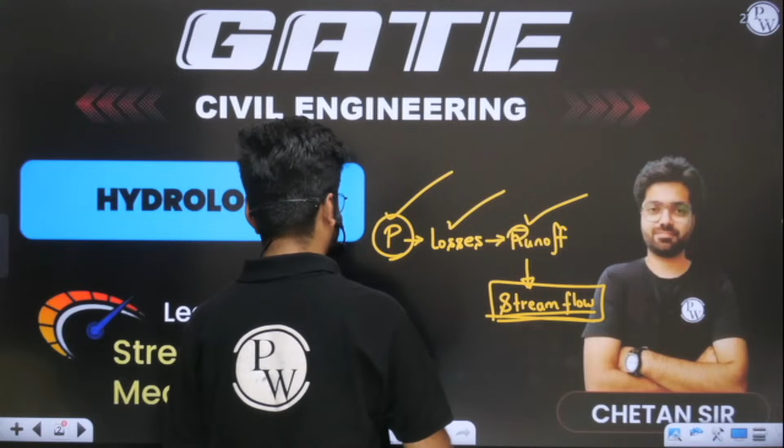So till now we have covered precipitation. After precipitation, losses take place. After losses, whatever water is left off becomes runoff. That water runs off over the land, subsurface flow, and groundwater base flow. After runoff, all the water through network of streams will join your stream, and hence it will become part of stream flow. So whatever water is left after the rainfall and after abstraction will ultimately become part of stream flow. Now in this chapter, we are going to measure stream flow. We have covered this in the last class, and today we are going to discuss this. I hope this is very clear now.

In runoff, yesterday we discussed what runoff is, what is direct runoff, what is base flow, what is delayed flow. We discussed types of streams: perennial, intermittent, ephemeral, and flow duration curve. Now today we are going to discuss stream flow. One small topic was left, flow mass curve, which we'll discuss along with the remaining things.

So in today's class we are going to discuss flow mass curve, measurement of stage, and measurement of velocity.

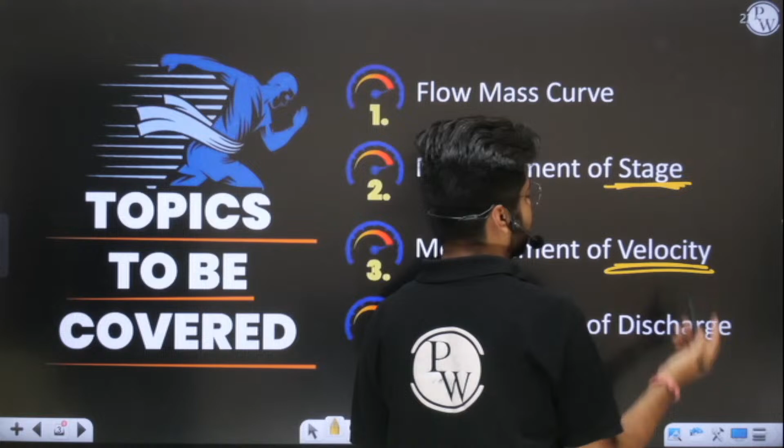Let us say we have a flowing water stream. What things can you measure, sir? Obviously I will measure the depth, I will measure the velocity of water, and I will measure the discharge. I will also explain why we measure it.

See, we have different kinds of streams: some are turbulent, some are sluggish, some are very fast moving. Based on that, we have different methods of discharge measurement. We'll discuss the conditions also, like which method is used when. So we'll start the lecture today. I hope everything is very clear to you.

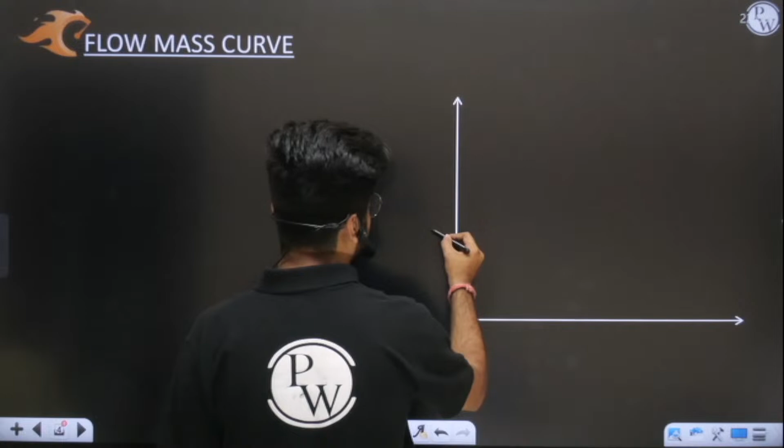So this is your discharge versus time graph of any stream. Now see, in this graph the discharge will vary. Obviously the river or any stream will not have a certain fixed quantity of water, it will move up and come down. So we have variations in this. If I plot the hydrograph or discharge versus time graph, I will observe that this graph will go up, sometimes come down, sometimes go up again, like this you will have certain variations. So the discharge versus time graph will vary, discharge will never be fixed, sometimes more, sometimes less. So this is your hydrograph.

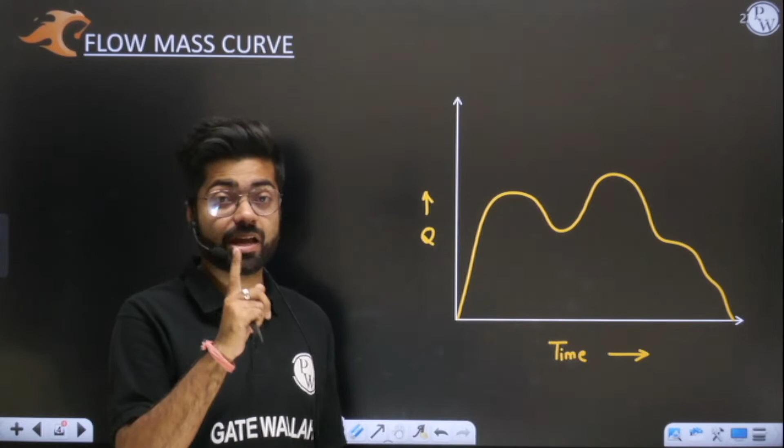Now what is the meaning of flow mass curve? Let me tell you, but before that let me ask you one question: tell me what is the meaning of mass curve. I have told you this thing before, so it's required that you all answer me what mass curve is. Everyone kindly tell me what mass curve is.

I have already told you what mass curve is. See, mass curve was - tell me, what was mass curve? Mass curve is none other than cumulative precipitation versus time.

So here we will also do cumulative value. See what you have to understand here - it is a plot of cumulative value.

Mass curve - you need to understand, this is the area. Let us divide it into certain parts. Let us say area 1 has area 1, the second area has area 3, the third area has area 6, and the fourth area has area 8. Now what I will do is the cumulative sum.

So cumulative sum will be 1, then 1 and 3 makes 4. Up to this point, what will the total area be? 1, 3, 6, this will be 10. Then when you sum it up, you will get 18. So this is cumulative value - this is mass curve, and this is the normal value. Yes, cumulative involves time. This is perfect.

Now if I will plot these cumulative values, you will see - wait, 1, 4, I have to remove this. Yes, so 1, 3, 6, 8 was there, and here 1, 4, 10, 18 was there.

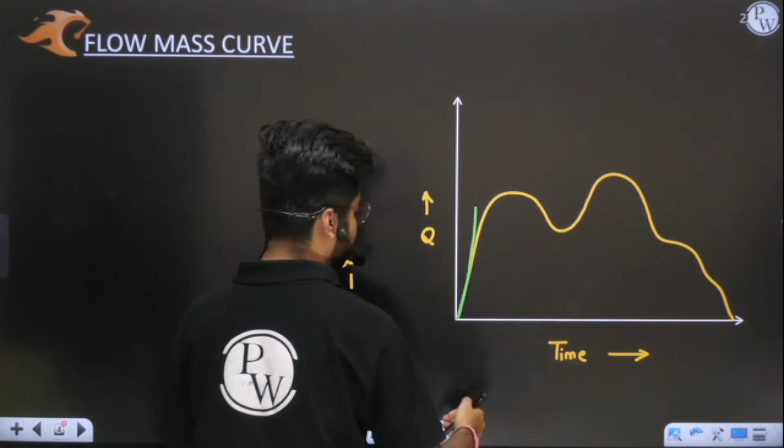Initially the graph will be same up to 1, but when you reach here, area is 3, but now this graph has to go up. It will go even higher, it will go up to 10. See, it is 6 here, but it is 10 there.

At 8 it is 18. So you will see that this will go up as you progress, as you move ahead in time. Areas will keep on adding, more area will keep on adding, and this value will go on increasing up to here.

So this graph will go up like this till this point. This is your flow mass curve. So what is this point representing?

If I want to understand what this point exactly is, I will say - this point will indicate the area up to this point. Let me shade it. So this is indicating area up to that point.

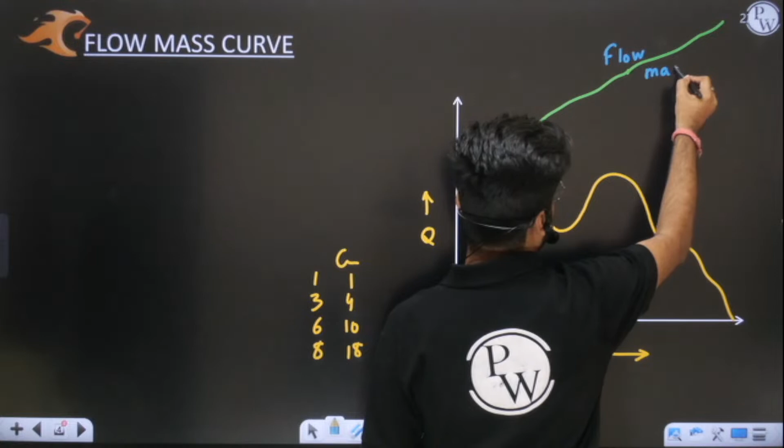This graph is known as flow mass curve, and it is indicating area up to that point T. So this is your flow mass curve. Understood, sir? Beautifully, I have understood.

So I will write the definition here. What is this? Flow mass curve is a plot of - listen very carefully - cumulative volume. If you will find area up to this point, you need to understand one thing.

In this hydrograph, if you will integrate from 0 to t, obviously you will get the volume, the total volume which has been passed through a section up to this time t.

Yes or no? Let us take an example to understand this clearly. Let us say we have a river, and this is your section. We are standing here observing, and obviously this section will give you certain discharge, because this is your river flow, or let us say a smallest kind of stream. So some discharge will be passing from here every now and then.

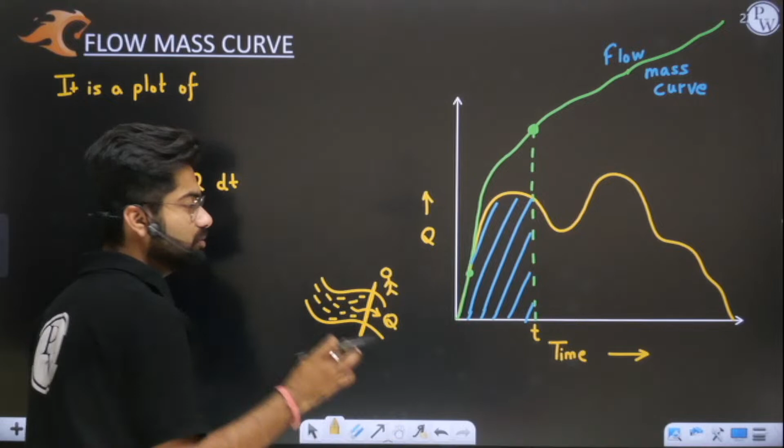This discharge is fluctuating also. Sir, tell me, what volume of water will pass through this section in 1 hour? What volume of water will pass through the section in 2 hours? So if I want to evaluate that, I have to integrate this hydrograph from 0 to 1 hour, 0 to 2 hours, like that. I have to integrate it.

I have to integrate my hydrograph from point 1 to point 2 in order to get the total volume of water which will be passing through this section. Yes or no? Tell me. So this point is indicating the amount of volume which has passed through this section up to time t.

If you want to find the amount of volume which has passed till here, obviously more area will be added. When more area is added, you will get a higher volume. So this is the logic behind this. We have understood very clearly that it is a plot of cumulative volume. You can also call this cumulative discharge from the start.

From the start is important because we will always integrate from the start, from 0. From 0 to this time, plot the value. Take different points, integrate, find the area and plot this area here. This area will give you the actual volume. So it is a plot of cumulative volume from the start against time. This is the definition of flow mass curve.

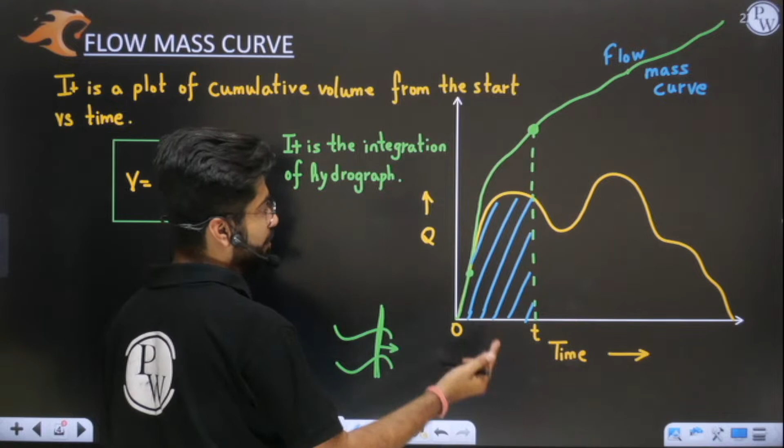So this green line is indicating volume up to time t that has crossed that section. How much water has crossed this cross section up to time t? This is answering that. This green curve is indicating volume up to time t. I hope this is clear. Yes or no? Tell me. So this is your hydrograph.

So this V is what, sir? This V is the volume, or you can say ordinate. Ordinate means the thing which is written on the y-axis. So this green curve is your flow mass curve, and this V will give you the volume up to time t. Simply integrate up to 1 hour, 2 hours, 3 hours, 4 hours, and so on, and get the volume up to different times.

So this is your ordinate of flow mass curve. Simply change the time, keep different values of time and get the value of ordinate which you have to plot here. Ordinate means the value which we plot on the y-axis. So if you want to draw the flow mass curve, simply put different values of t here and get different V. This gives you the V versus t graph, shown with the green line.

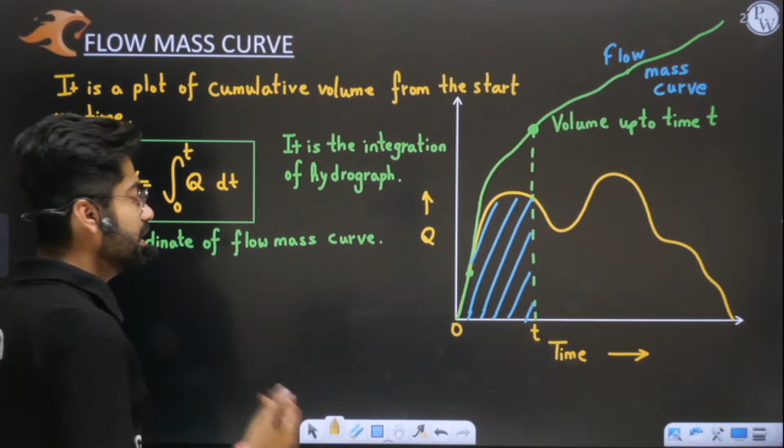Now the question arises, sir, why are we finding this? This point is important because it has been asked in your engineering services preliminary examination. Listen very carefully. This flow mass curve helps in determination of what? Determination of reservoir capacity. So this is the thing.

How come, sir? Listen very carefully. Let us say we have a river valley and on that river flow was there. Now imagine we have constructed a reservoir or a dam there. Try to understand. Let us say we have constructed a huge dam here.

Okay, let us say we have constructed a huge dam here. Then what will happen? You need to understand that in a certain amount of time, this water will slowly and steadily build up here. We have to collect water here, so obviously we have blocked it, so this water will start building up here. So how much water will be accumulated behind the reservoir in time t? That we can easily evaluate from this equation. Yes or no? This I can easily evaluate, and based on that I can build my dam also.

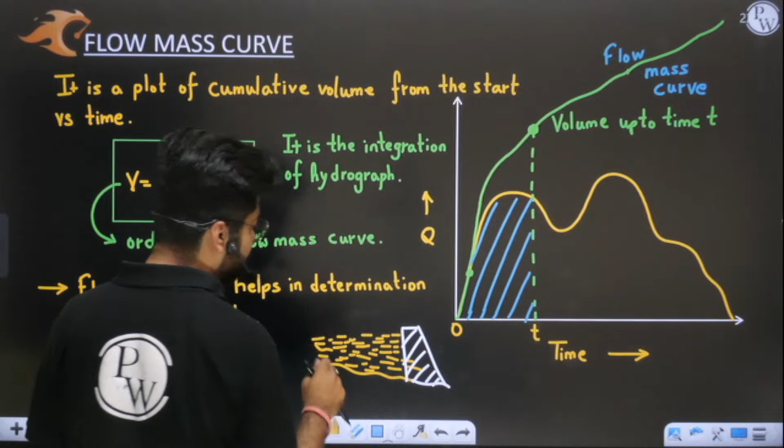Based on that I can have my reservoir capacity. So the capacity can be determined with the help of this integration, with the help of your flow mass curve. This flow mass curve will tell you how big my reservoir should be. The more water we want to store, obviously we will take a higher value of T so that more volume accumulates, and obviously the cost for the construction of such a dam will be more. So I hope this thing is clear.

So this is your flow mass curve. Yes or no? Yes, perfect. I hope the flow mass curve thing is very, very clear to you. Now we'll move ahead and discuss what stream flow is. So this was your flow mass curve. Now we'll discuss the very important topic which you have to start today, stream flow.

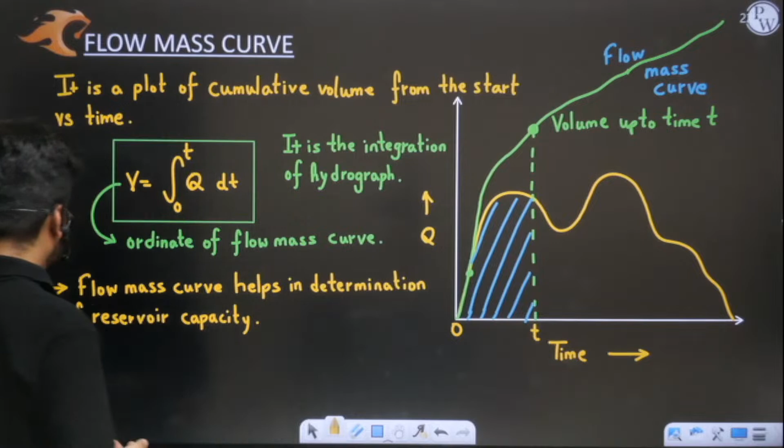Listen very carefully. Sir, you told me that precipitation is there. After precipitation, losses are there. After losses, all the infiltration, evapotranspiration, interception, depression storage, all these things are done. Then runoff will be there. After runoff, stream flow will be there. Okay. Now guess. I am just asking you a simple question.

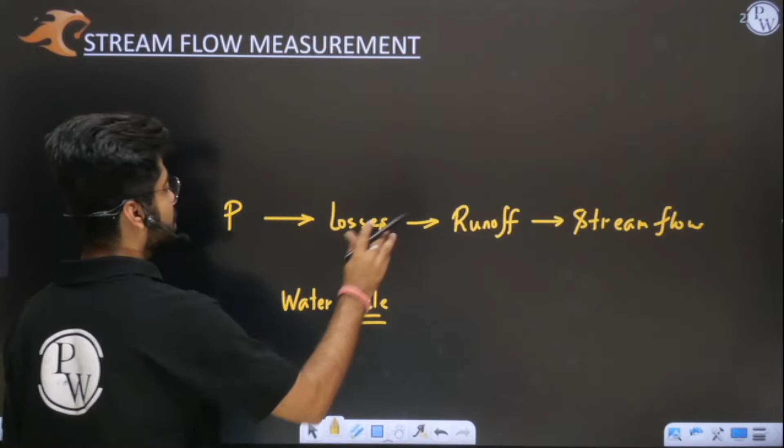This is a phase of the water cycle. You all should understand this is a part of the water cycle. In the water cycle, sometimes precipitation will be there, sometimes losses, sometimes runoff, sometimes stream flow. So these are all different phases of your water cycle. I have a simple question. Out of all the phases of the water cycle, tell me which phase you are going to measure accurately.

Obviously we have tried to measure precipitation, losses, and runoff also. I told you around 6 methods for determination of runoff yesterday, and in this chapter we'll discuss measurement of stream flow. So can you guess which phase we are going to measure most accurately out of all these four?

Yes, stream flow is the one. Absolutely correct. Because a stream has a well-defined geometry, and the discharge, flow, velocity, or depth will be easily measurable as compared to your precipitation, which is a very variable quantity. Losses are also very variable. Runoff is also variable. Runoff happens on land.

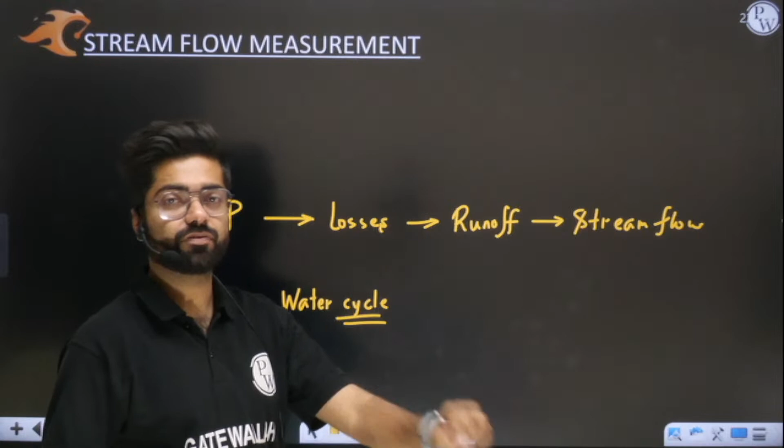You need to understand how you can measure runoff. It depends purely on land use pattern. Somewhere forest will be there, somewhere barren land, somewhere fallow lands. So in different cases you will find huge difficulty in measuring the runoff. All these are difficult to measure and will not give you accurate results, but if you measure the discharge, velocity, or depth of stream flow, you will get it most accurately.

So I will write here the very first important point: stream flow is that phase of the water cycle which can be measured most accurately. Now, what things are we going to measure? In this chapter we are going to do measurement of what?

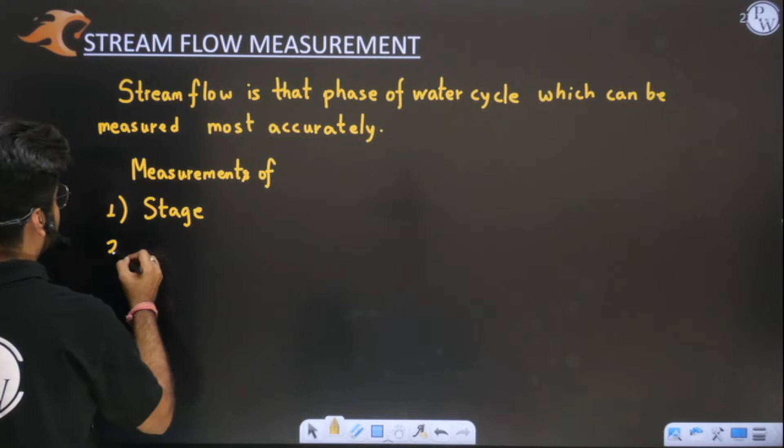Measurements: first we'll measure stage, secondly we'll measure velocity. This velocity thing is important because a velocity question has been there once in your GATE examination, and discharge is also a little important. A question from measurement of discharge was there in your GATE examination in 2023, in set 2. Obviously this Streamflow chapter is not so important, but we'll discuss it.

So first we are going to measure stage. How do we measure stage? What is the meaning of stage? Stage means the depth. The depth of water changes. You should appreciate the fact that with passage of time, the depth of water changes. Yes or no? Yes.

Yes, we can easily calculate dimensions of a river, perfect. These are practical because the things we have to measure are limited to a very small space. But rainfall happens in a very big area, and runoff takes place in a huge area, so those are very difficult or cumbersome to evaluate. Stream flow takes place in a confined, limited area. That's why the measurement is accurate.

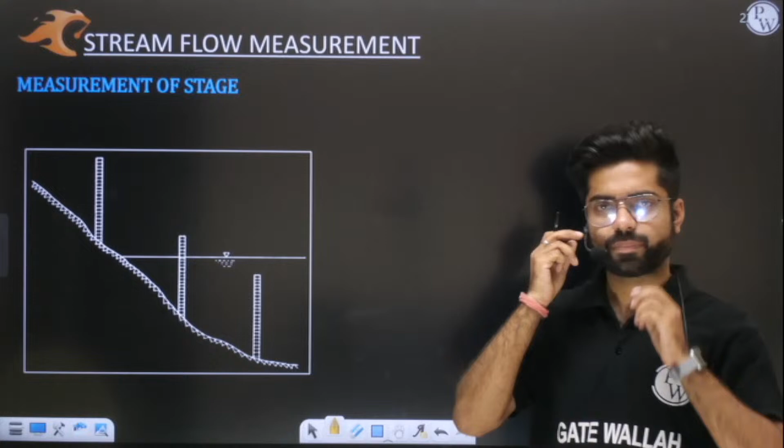Now the first thing we are going to measure is stage. For measurement of stage we have some manual methods and some automatic methods. I will tell both to you all. The very first one is manual methods. In manual methods we have two methods. We have staff. See, these are your staffs.

Let me write the two types of methods for measurement of stage. This is simple. The first one is manual methods. In manual methods, again two methods are there. The first method is the staff gauge. We will manually put the staff at different levels of your river. Different staffs are required when your river is deep; with moderately deep rivers you put different staffs and take differential readings.

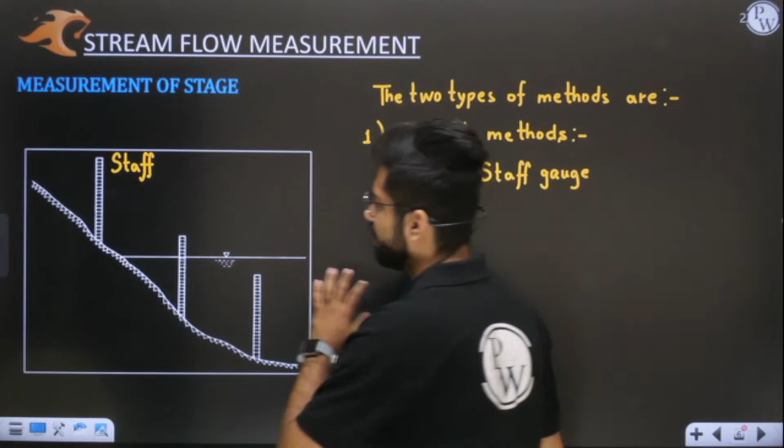But if we have shallow streams or shallow rivers, then we'll take only one staff, and the level of water will give you the mark up to which the depth of water has been. This staff is completely submerged, that's why we require more staffs. When the level of water increases, this one will also get submerged, then this staff will work. So we have differential staffs placed so that the level of water is measured correctly. So this is a staff gauge.

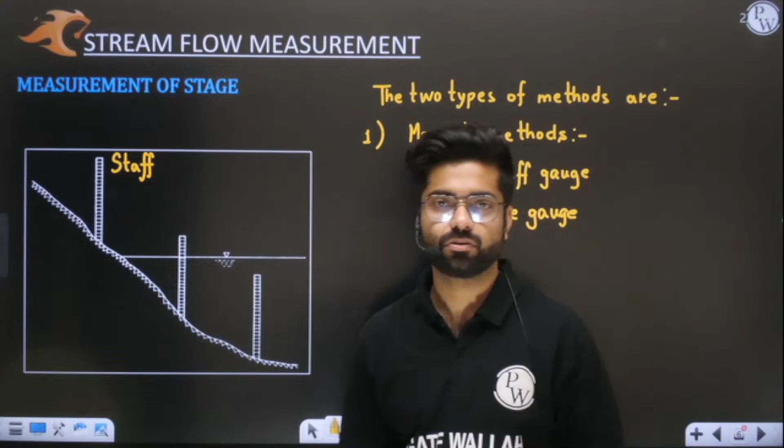The second one is your wire gauge. In wire gauge we have a wire which is lowered into the stream to measure depth. Imagine you are standing above some bridge and lowering a wire into the river. At the bottom you put some heavy weight such as a stone or some metal, so that the wire goes straight into the river or stream. Let us say we lower a wire here and it has touched the bottom.

After that we'll take out the wire and see up to which mark it has wet the wire, and up to there I will measure the distance or depth. So this is your wire gauge method. In this method, a wire is lowered into the stream to measure depth. Yes or no?

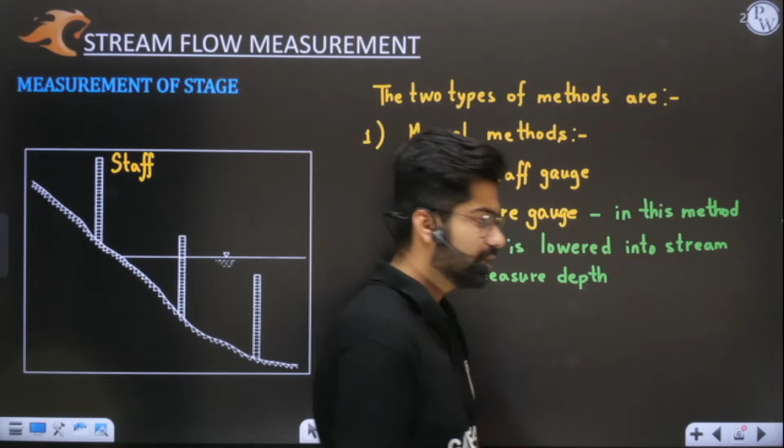Generally the length of wire you take is not more than 25 meters. So I will write here: this method is suitable up to a depth of 25 meters, not more than that.

Okay, 25 meters is, you can say, sufficient height. So wire gauge is basically for this one only. Okay, now this is the first method. So this first one is your manual methods. I hope manual methods are very clear to you. In this we have discussed staff gauge and wire gauge.

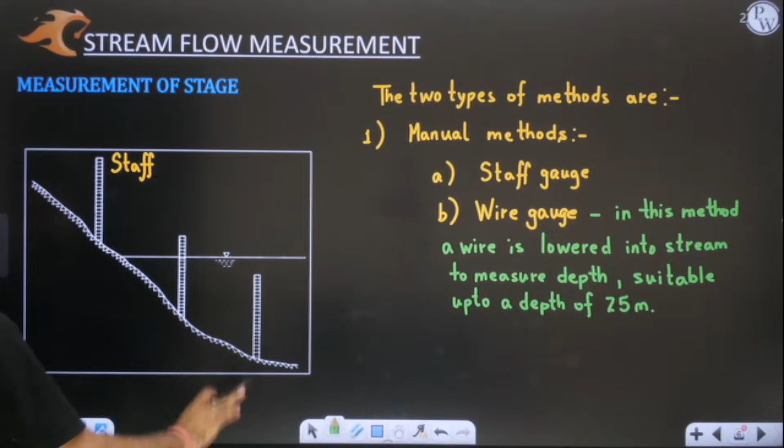Okay, here you can see your vertical staff kept here. So these are your staffs, these are your vertical staffs. You must have seen these vertical staffs in survey also. Okay, now we'll move on to the second method, which is your automatic method.

See, in these manual methods, obviously you need to understand manpower is required, human resource is required. Some skilled man will be required here in order to install the staff, and a man should be required to lower the wire into the river or stream. So for manual methods we require labor. Now the second one is automatic methods.

Okay, the second one here is automatic methods. In automatic methods there is no requirement of labor. Okay, there is no requirement of human resource, there is no requirement of a person. Okay.

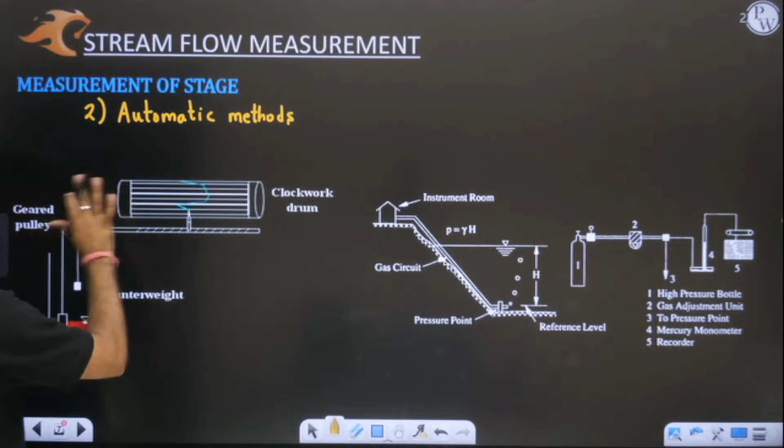Okay, now we'll discuss automatic methods. See, in automatic methods we have two methods. See, this one is your float gauge recorder, and that one is your bubble gauge recorder.

Okay, sir, how do they measure? Sir, kindly tell me how they measure the depth of water. So tell me how the bubble gauge and the float gauge measure stage. Okay, so you need to understand this thing. This is important. Listen very carefully. See, you can see this diagram here.

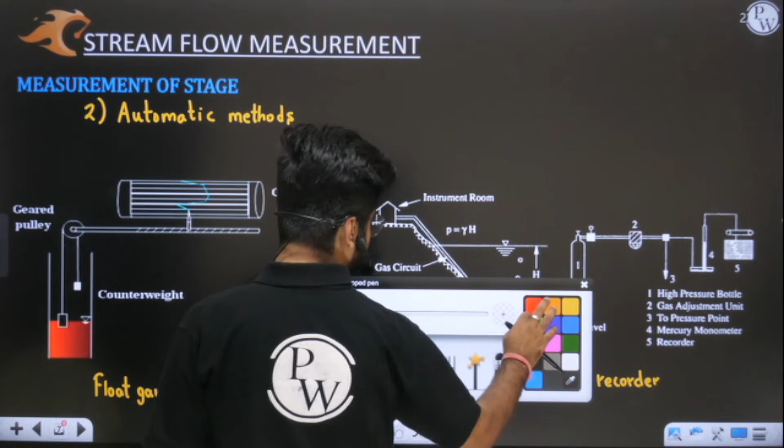In this diagram you have to understand we have a float. Okay, I hope you can see this float. Let me color this with some different ink so that it is more clear. I will color it with white only. Okay, yes. So this is your float, a plastic float obviously. See, this float seeks the level of water every time. Understood, sir? So this float will seek the level of water every time.

Okay, now see this entire assembly. See, we have a pulley. From this pulley we have lowered a float, and in order to keep this wire completely tight we have added a counterweight. So this is your counterweight. See, what is the function of the counterweight here? So that the float remains stable. Otherwise what will happen? This float will move here and there.

Okay, then second thing, we have closed this entire assembly into a stilling well. We have a closed chamber. In this we have installed this assembly. Okay, sir, why? Sir, tell me why you have taken a stilling well here. Because you need to understand, this is your stilling well. In your streams or rivers fishes may be there. Wave action is also there.

So because of some action of fishes, insects or birds maybe, or let us say waves, because of all these rough actions this system can become unstable. Okay, this wire can get cut if fishes are there. Or this system will ultimately become unstable if you keep it open. So that's why I am putting this entire arrangement in a stilling well.

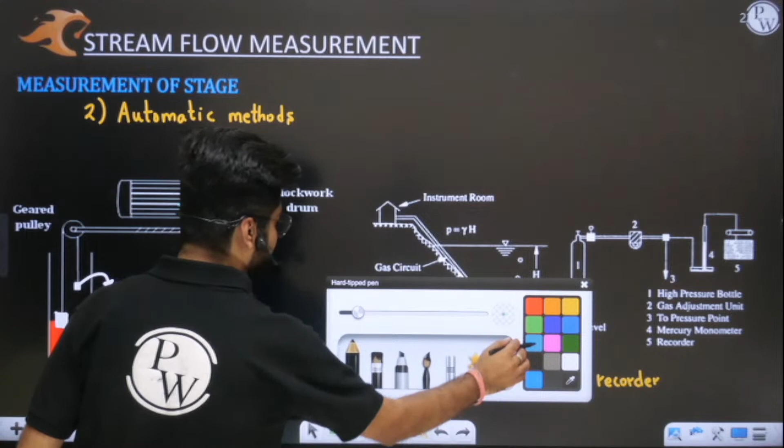Now you need to understand that this cylinder will have the level of water equal to that of the outside water, the level of the stream. Okay, now imagine water will go up, and water can go down also. See, you need to understand this float is constantly at the surface. Now when water goes up, this float will also go up, and this counterweight will go down.

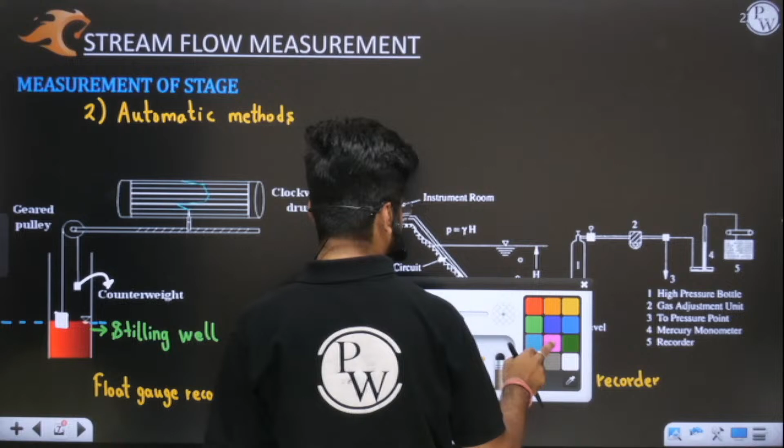And when this float will go up, you need to understand, from this pulley a pen is attached. When this pulley will roll, this pen will start moving. When this water will go down, float will also go down, and the pen will start moving in this direction. Okay, this is rolling. This is your clockwork mechanism.

This we have already discussed in your natural siphon part, natural siphon weighing bucket, where we have discussed recording rain gauges. So now when the float is going down, when water level in the stream is going down, this pen will start moving in this direction. When this float will start moving up, this graph will go in this direction. Like this you will have a graph which will give you continuous variation of the depth of a stream versus time. Yes or no?

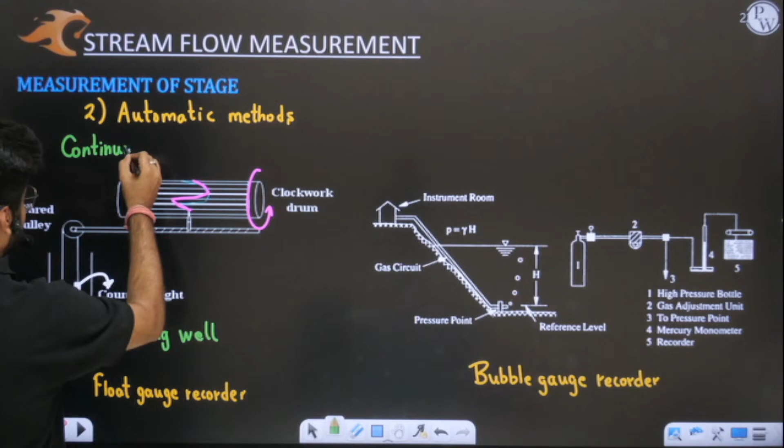Sir, this float gauge recorder will give me continuous variation of depth, continuous variation of stage, means depth of water versus time. From this chart I can read at what time the level of water was what. So this we can read out from this graph. Understood? Now the second method.

Great. Yes, you all are talking about consistency and inconsistency in the chat box. Obviously no one can beat consistency. Consistency is the ultimate key.

So what I was saying is, now the second method is your bubble gauge recorder. What happens in a bubble gauge recorder? Let us assume this is your level of water. Now we have an instrument room here, a laboratory, just in the vicinity of your stream or river, whatever it is. Now what will happen?

We will lower down a pipe up to the bottom of your river or stream. Let us say this is your river bed, and up to this point we lower a pipe. Now with the help of some pump or motor, I will insert pressure, and through this pipe I will pressurize air bubbles to come out from here. These air bubbles will come out and will rise to the surface.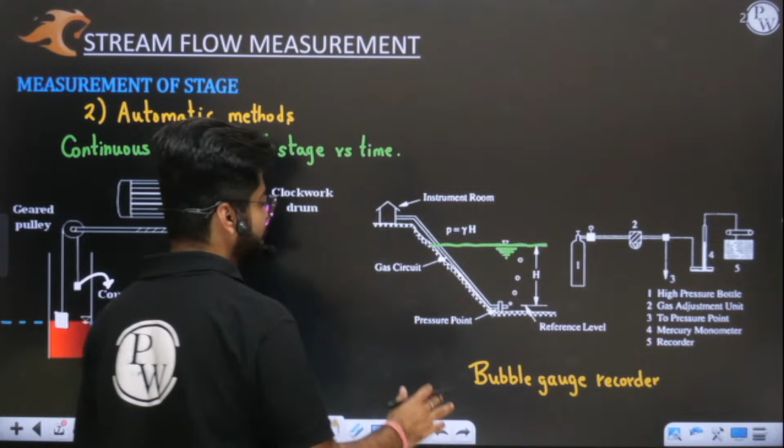Now tell me, how much pressure will be required for this air to come out? I hope you all know the pressure at depth h in your fluid. You must have read that pressure at depth h in any liquid medium is rho gh. So now the pressure can be calculated, because the pressure which is required to squeeze this air out at the bottom will be equal to this pressure only.

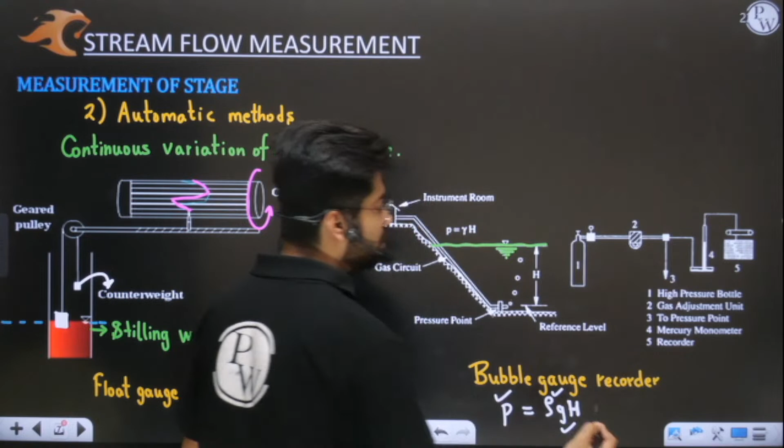This pressure will be read here in the manometer, in the instrument room. Rho we all know is 1000 kg per meter cube, g is 10 meter per second square approximately. So from this formula we will find the value of h. So bubble gauge will require some pressure in order to ooze out air bubbles, and that pressure we will put in this equation to find h. Is this thing clear? So with the help of this pressure I will find the height.

So these are your automatic methods. We have discussed measurement of stage: staff gauge, wire gauge, and automatic methods, in which we discussed float gauge and bubble gauge recorder. Now we'll move ahead and discuss measurement of velocity, another important concept.

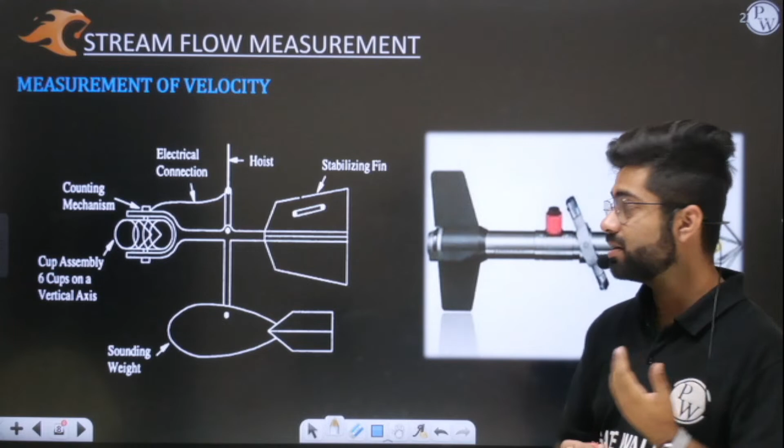We have current meter, which is one of the important topics of hydrology. Current meter is also known as price meter. You can see this is a current meter. We have two kinds of current meter basically: a vertical current meter and a horizontal current meter.

Try to look at this assembly. Basically, we will discuss two types of current meters. Current meter is used for measurement of velocity. Current meter is also known as price meter.

Current meter is also known as price meter, which is used to measure velocity. Firstly, you need to understand these are of two types. The first one is a horizontal one.

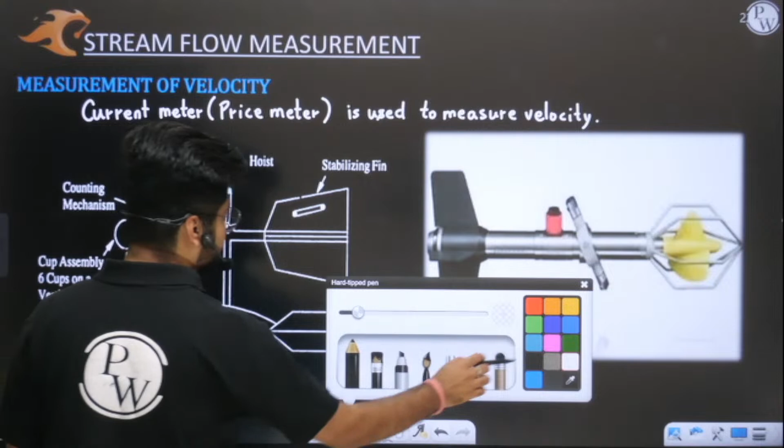In this horizontal setup, this is our vertical current meter. How is this vertical, and which is horizontal? This is your vertical price meter or vertical current meter, and this one is your horizontal current meter.

Understood? See, what is the principle or mechanism with which your current meter works? What I will do is submerge this assembly into the stream. This complete assembly will go down into the water.

After going down into the water, water will be continuously flowing. That flow of water will act on this axis, around which we have 6 cups on a vertical axis. This is the cup assembly. We have basically 6 cups here, and these cups will start revolving.

You must have seen at the top of some buildings some wind vanes. Those wind vanes rotate when there is optimum wind velocity. You will see that the wind vane rotates.

In a similar fashion, when this water starts flowing, these 6 cups which are placed here, this cup assembly, will start rotating. You should appreciate that the faster the velocity of the water, the more speedily these cups will rotate. The rotational speed, the number of revolutions per second, will be more if your water is faster.

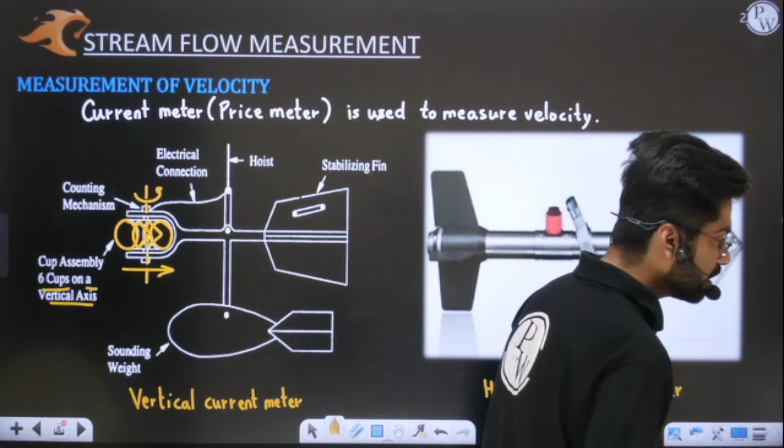So what this means is, in this we have a vertical axis around which this assembly is rotating. About this vertical axis, your cups are rotating due to the flowing water.

But in the horizontal current meter, you need to understand this meter has a blade. Can you see this blade? When this current meter moves across the river, let us say we have submerged this entire assembly into the water.

Now what will happen? Because of the flowing water, you will see that this fan, this blade, will start rotating about a horizontal axis.

This blade will rotate. The faster the rotation of this blade, that implies that the river water or stream water is even faster. The rotational speed of this blade, the rotational speed of the current meter, will indicate how fast the water in your river is.

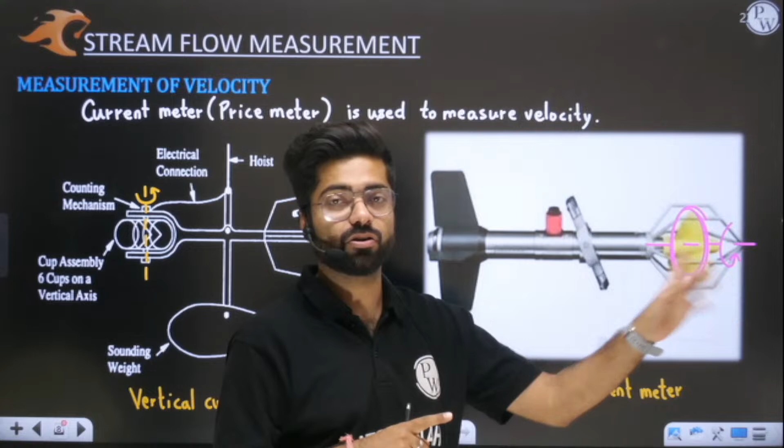So in this one, rotation is about the horizontal axis. This is your horizontal current meter, because the axis is horizontal. So we have basically two kinds of current meter.

But one thing is for sure, we need to understand that velocity is proportional to n, meaning the rotational speed of this assembly. Listen very carefully, we have to understand this.

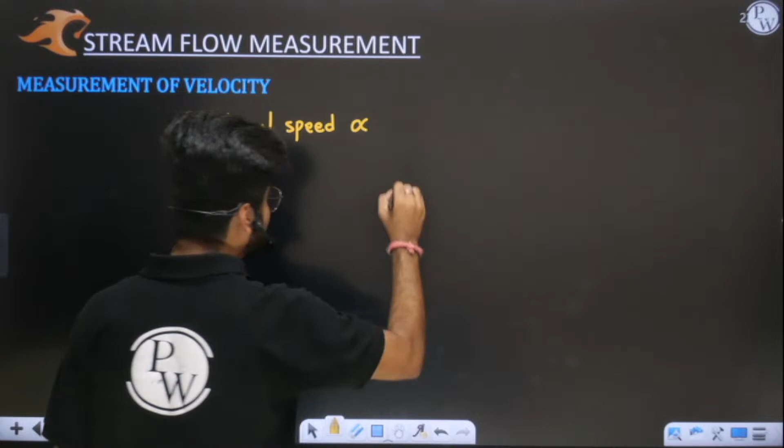Here, that rotational speed of current meter is proportional to the velocity of water. The faster moving water is, the more rotational speed of your current meter you will see.

So higher the stream velocity, higher will be the rotational speed of your current meter. This is an important phenomena you need to understand. I wrote it in reverse, but basically we should write stream velocity, or velocity of your river or stream, is proportional to rotational speed. So V is proportional to N.

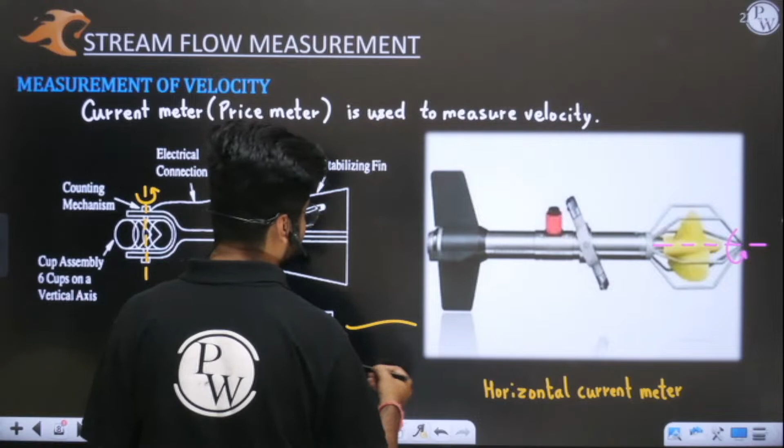I hope this is very clear to you. Now I will write the theory part. Current meter, as I've already told you, is used to measure velocity at any depth at any given section. Let us say this is your river flowing, you are here, and in this section you can go up to any depth and find the velocity with the help of this current meter.

Basically it is of two types. The first one is vertical axis current meter. The second one is horizontal axis current meter. So we have vertical one, we have horizontal one.

Now we have a sounding weight at the bottom. In this current meter we have certain attachments. Let us see here - this is your sounding weight. At the bottom you can see we have a weight here. Why is this weight here?

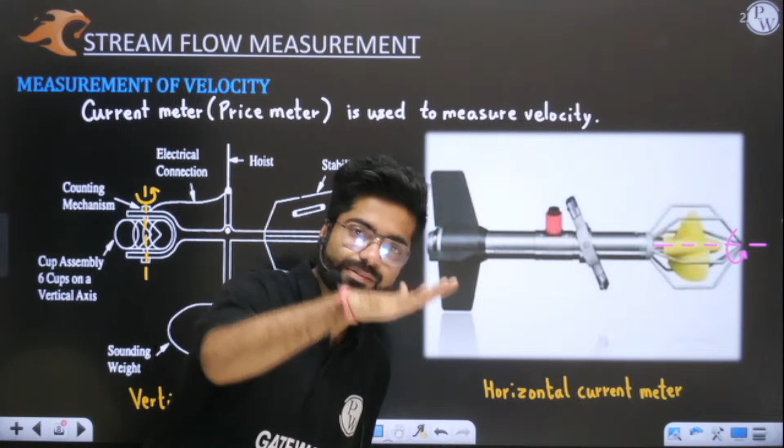You need to understand, when you will lower the current meter into the river, this sounding weight will stabilize the current meter. If this weight was not there, this entire hoist will disbalance. Because of this weight, this vertical assembly will remain in a straight line and will be stable. We have a stabilizing fin also here, we have a sounding weight also here, so that this entire assembly remains stable and is not affected by shock waves or something.

So I will write what is sounding weight. Sounding weight basically stabilizes or balances the weight of current meter.

How much weight we should attach here, the formula for that is given by W equals 50 V average into D. W means sounding weight, and this weight will obviously be in newtons. V bar is average velocity of your stream. D is depth of water.

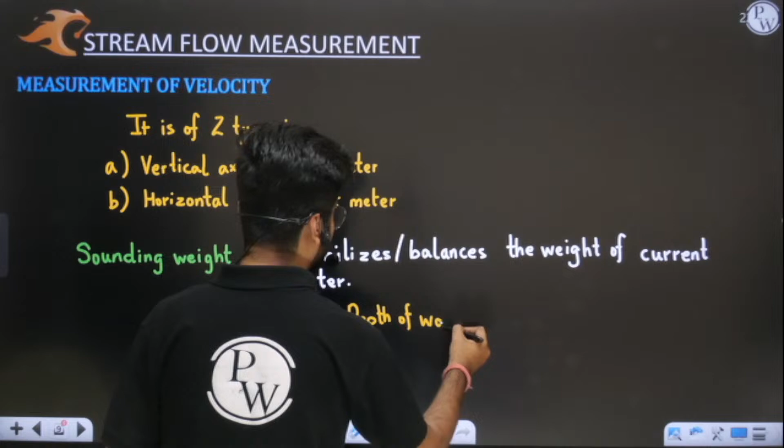So more the depth, more is the weight which you should attach, otherwise it will get unstable. More the depth, more the weight. This is a simple concept. I hope this sounding weight concept is clear to you.

Now, you have been told that stream velocity is proportional to rotational speed. This is for sure, this is simple. Now we have one formula - if we apply constants here, we get this final relationship: V equals AN plus B. This is the ultimate relationship which you have to remember. V is proportional to N, and when I add constants, we have two constants known as A and B.

Now how do I calculate this A and B? For calculation of A and B, I have to do calibration. The meaning of calibration is that I have to find these constants. Once I know these constants, I will put these values here and simply put the value of N in order to evaluate or compute the value of your stream flow velocity. Let us say you know the value of A and B.

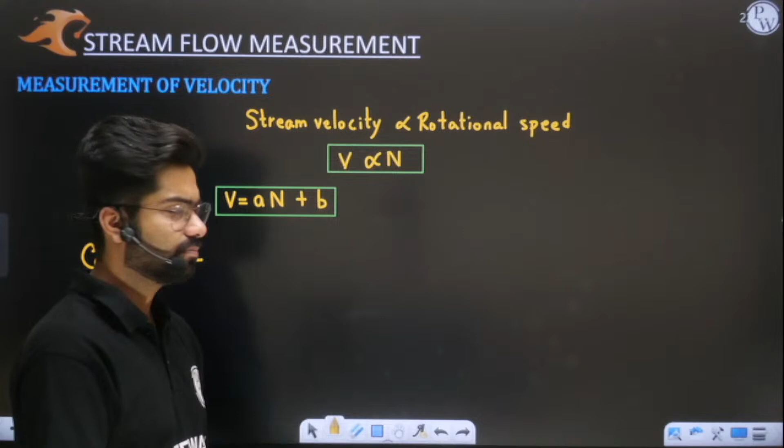Just suppose you know the value of A and B. Let us suppose that we know the value of A and B.

Hello, dear. Hello, dear. How are you?

So what I am saying is, let us suppose we know the value of A and B. Now I have lowered down the current meter into the stream. Let us say this is a stream, and we have lowered the entire assembly of the current meter into it, going 2 meters deep.

When we have gone 2 meters deep, the current meter has rotated 50 revolutions in 1 minute, that is, 60 seconds. So the value of n will be 50 rotations in every 60 seconds. This is the rotational speed n.

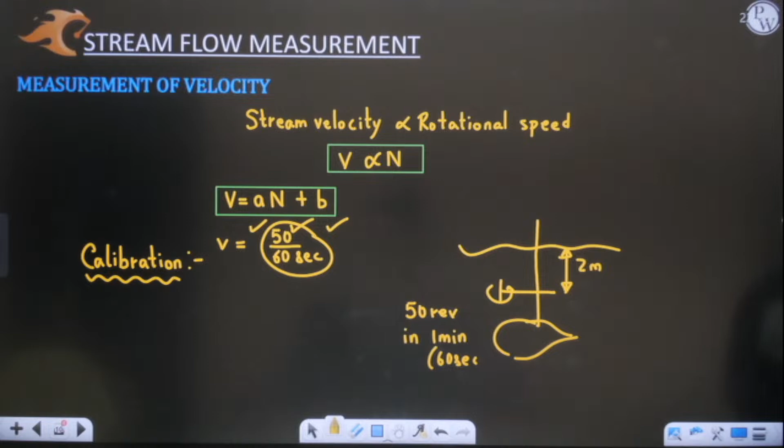When you put the value of n, since you already know A and B, simply by putting the value of n you will obtain the velocity of the stream. Yes or no? But first, you have to know the value of A and B.

This is important. So now, tell me how I will find the value of A and B. For finding the value of A and B, we have an instrument known as the towing tank.

Calibration means we have to find these constants A and B. We have to calibrate the current meter and find a relationship between V and N. This calibration is done with the help of a towing tank. What is the meaning of towing tank?

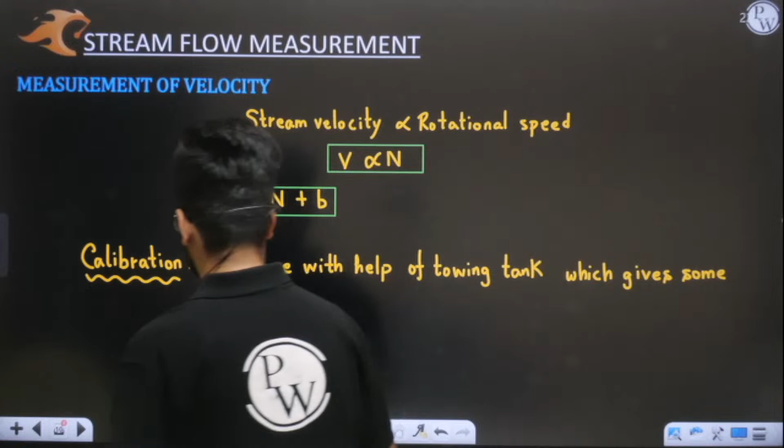I will explain, don't worry. With the help of the towing tank, which gives some values of n corresponding to V, which helps in finding constants A and B. How? Tell me.

A towing tank is an instrument with the help of which you can pull a current meter. Let us say this is your towing tank, and this water is permanently still. In this water we have no velocity; the water is not flowing. Let us say this is your towing tank.

Try to comment, everyone. Now with this towing tank, I have attached a current meter. When this towing tank moves, the current meter will be lowered into the water.

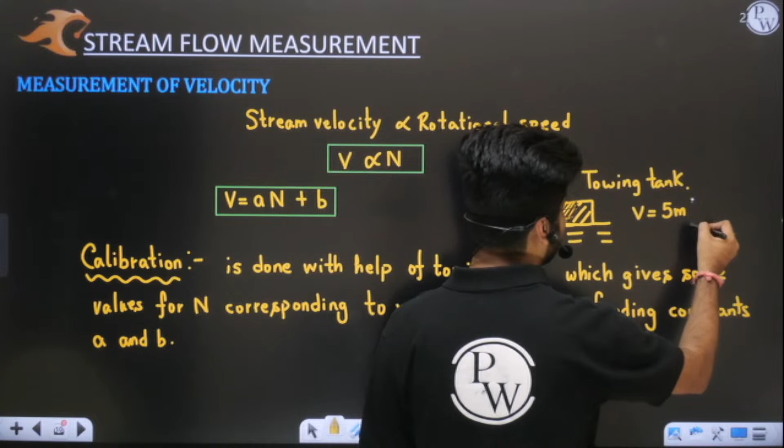Now let us say we have moved this towing tank. A towing tank is a kind of tractor thing, pulling the current meter. Let us say we have pulled this towing tank at a speed of 5 meters per second, and when we have pulled it at that speed, the number of rotations in the current meter is, let us say, 40 revolutions per minute.

In 1 minute, with the help of a stopwatch, I will count it, and then I will change the speed. Let us say I just double the speed. When the towing tank moves faster, the rotational speed or number of revolutions will increase. Let us say it has gone to 70, or let us say 90 per minute.

So when velocity is 5, n is 40. When velocity is 10, n is 90. You will use this equation, putting the value of v and n. Again you will put the value of v and n. You will get two equations. Solve them simultaneously and you will get the value of A and B.

Solve that equation simultaneously and you will get the value of a and b. Yes or no? Have you understood this thing?

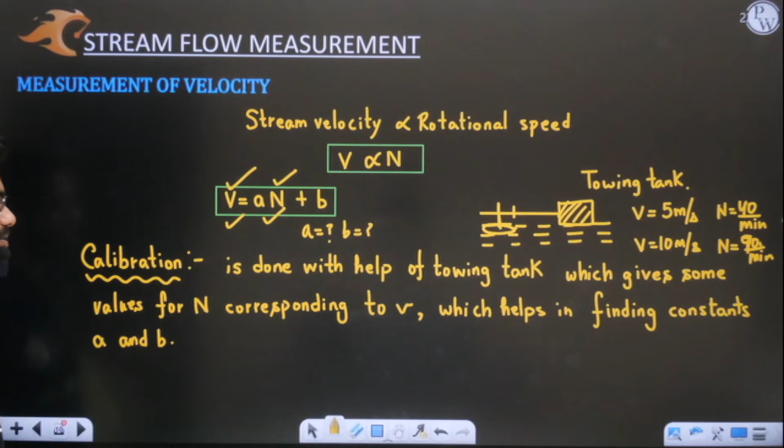So with the help of towing tank, you will drive that towing tank. You will obtain certain speeds, and corresponding to those speeds you will find the rotational speed. You will count the rotational speed, you will observe it. With this data, this towing tank will give you some values for n corresponding to different velocities, which will help me in finding constants a and b simply by using this equation. So I hope this thing is very clear to you.

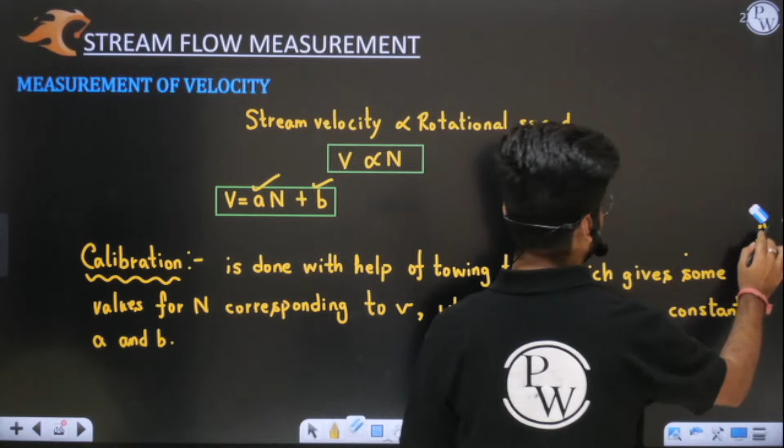So with the help of towing tank you will find. Let me give you some example with the help of which we'll understand how this towing tank thing works. And after we have found out the constants a and b, simply put the value of n and get velocity. Your current meter will give you rotational speed. Simply put that rotational speed and find the velocity. This is one of the best methods to find velocity at any depth, at any section. So is this thing clear?

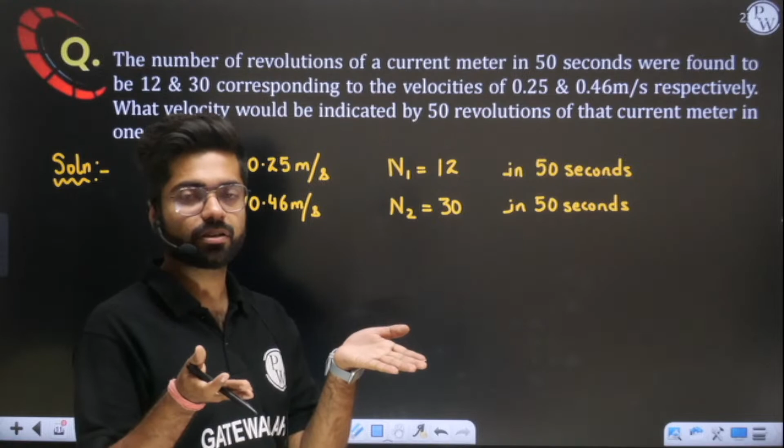Now the question is asking what velocity would be indicated by 50 revolutions of that current meter in 1 minute. So if I want to find the velocity, first I have to find the equation. Without finding A and B, how will I find velocity? First, I have to find A and B. Then I will put the value of n which they are giving, and obtain the velocity, because the question is asking you velocity.

But for that, we have to do calibration first. With the help of towing tank, I will find the constants A and B, and then I will move ahead and find my velocity. Tell me how I will do this. You all know the relationship is V equals A n plus B. Relationship is V equals A n plus B.

Now, if V equals A n plus B, then I will use these values. First equation: velocity is 0.25, A is A, and N is how much? 12 revolutions in 50 seconds. Rotational speed is what?

12 by 50. Okay. I will not write N here. This is 12 revolutions in 50 seconds. This is 30 revolutions in 50 seconds. So I will write the value of N is 12 rotations in every 50 seconds, number of rotations per second, plus B. So this is your first equation.

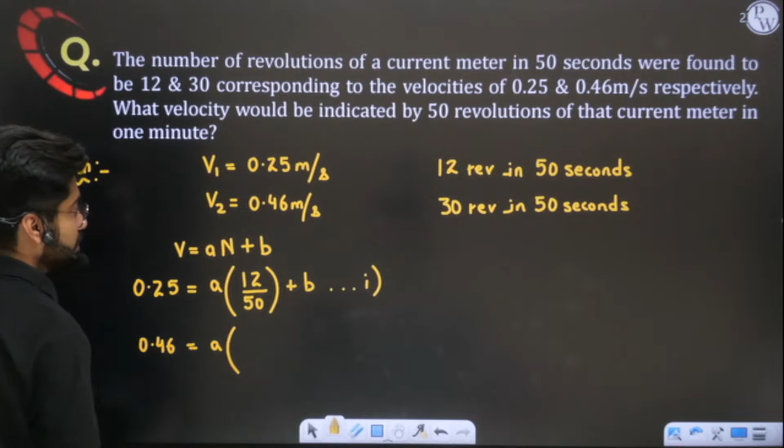Now the second equation will be velocity is 0.46. N value is 30 upon 50, plus B. This is the second equation. Now I have to simply solve them simultaneously.

See, subtract this. When you subtract 1 from 2, B and B will get cancelled. This will be 18 by 50 and this will be your 0.21. So 0.21 divided by 18 into 50, you will get the value of A. Okay. So this is simple. You can solve it. Let me solve it in calculators and see what we are getting here.

When you solve these two simultaneous equations, solve for A and B. So from this one, I will simply calculate the value of A. When you subtract, B and B will get cancelled. This will give you A as 0.5833. Okay, now A you have got.

Simply put this value of A in this equation and find the value of B. When you put A as 0.5833, multiplied by 12 by 50, subtract it from 0.25, you will get the value of B, which is coming out to be 0.11.

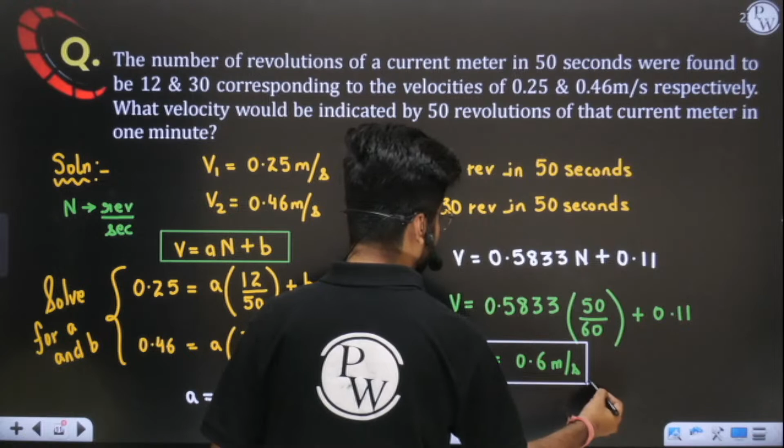Yes, so what we are getting here is 0.6 meter per second. When you solve, you will get it as 0.6 meter per second. Okay, so this is the solution to your GATE question. I hope it is very clear to you.

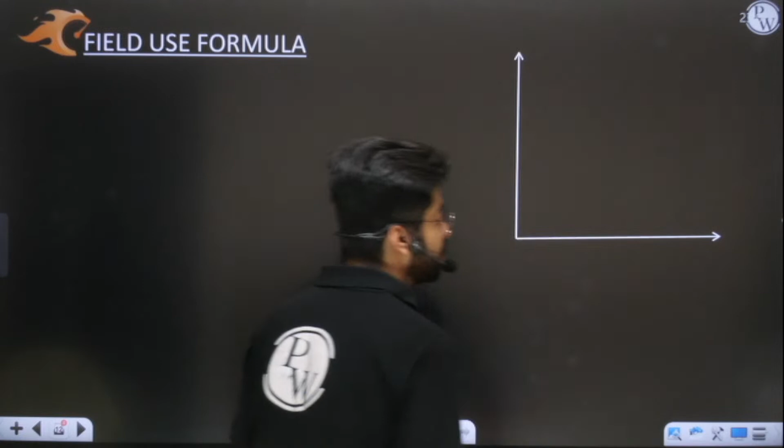Okay, so can you tell me the value of velocity, will it be same at every depth? The answer is no. The velocity will be different at different depths. Listen very carefully here. The velocity will be different at different depths.

So on this x-axis, I have written velocity, and on this y-axis, I have written depth. This is basically a logarithmic kind of curve. So velocity is less at the bottom. It will increase as your depth is increasing. See, this is your channel bed. As you go far away from bed to the surface, you will see that velocity is increasing.

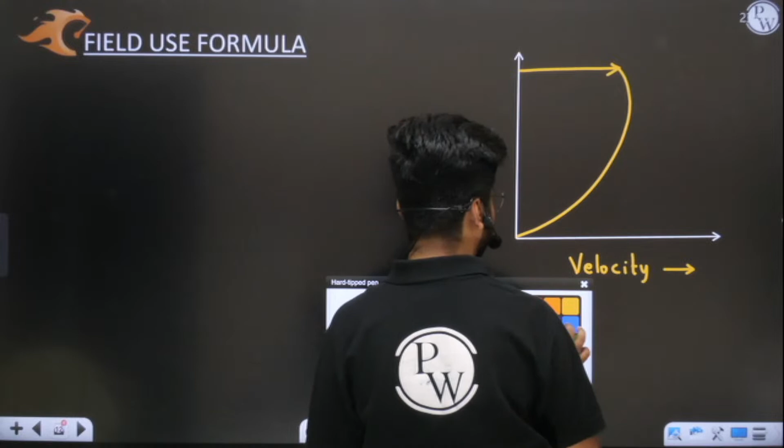This is your maximum velocity, and at the surface we have little less velocity. This is your surface velocity, indicated by Vs. Vs means surface velocity. This is your Vmax; velocity is maximum here. So maximum velocity occurs just under the surface. At surface we don't have maximum velocity; we have maximum velocity just below the surface.

This is generally for open channels. For any kind of streams, for any kind of open channels, you will generally witness this kind of velocity distribution. So this is basically your velocity distribution curve, velocity distribution with respect to depth. Is this clear, SK?

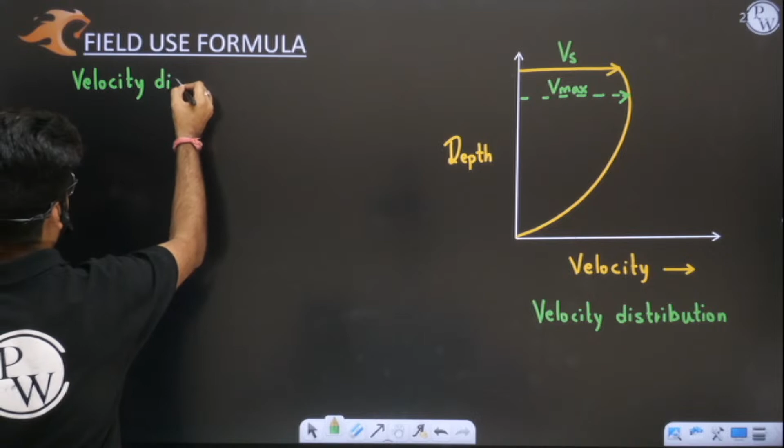Yes, perfect. Great. Can you tell me, SK, what is the shape of this curve? Is this parabolic, elliptical, hyperbolic, or logarithmic, exponential? Can you guess it? Try to guess it. Till then I will write here. See, velocity distribution is, first you tell me, then I will write here. Let me see if you are able to answer it clearly.

I think you don't know it. You are saying it parabolic. No, wrong. Velocity distribution profile is logarithmic. Okay, this you can learn. So in open channels, for any kind of stream or river, you will see the velocity profile is generally logarithmic in nature.

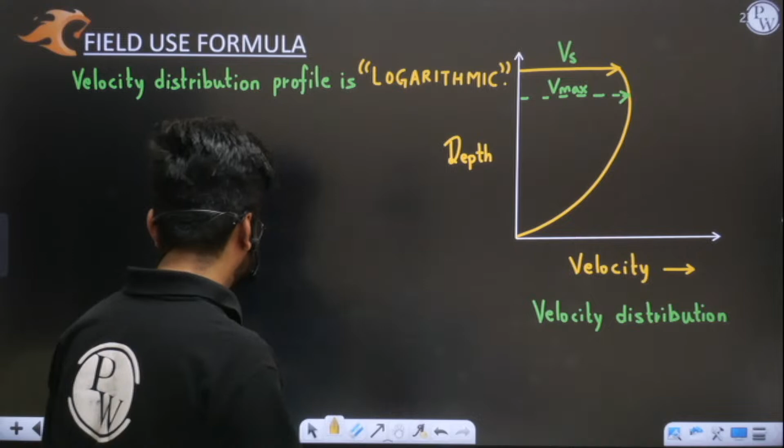Now we'll understand different formulas for average velocity. Listen very carefully. The very first one is: average velocity will be equal to V0.6. Now this average velocity is equal to V0.6 only for shallow streams.

This formula is valid for shallow streams whose depth is even less than 3 meter, which are very less deep, or you can say those are shallow. So this formula is valid for your shallow streams. Now, average velocity is equal to V0.6. What is the meaning of V0.6?

See, V0.6 means, listen very carefully, assume this total depth equal to y. Now V0.6 means you will find velocity at 0.6 times the depth. 0.6 times the depth means what? Let us say this is 0.5, this is 0.6. The velocity here will be termed as V0.6 when you are going 0.6 y deep from the surface.

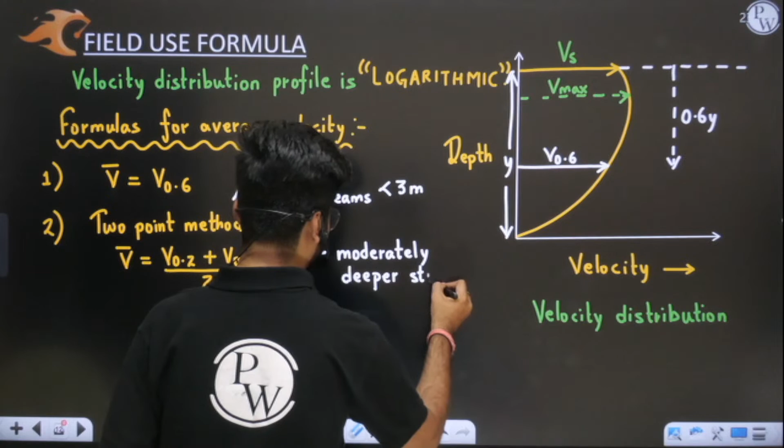Then we have the 2-point method. So V average is V0.2 plus V0.8 upon 2. This is for moderately deeper streams. If you have streams which are deeper than 3 meters, then I will use this formula.

Now what is the meaning of V0.2, V0.8? I will go 0.2 times the total depth. Here I will measure the velocity; this velocity will be V0.2. Then I will go 0.8 times the total depth. Here I will measure the velocity, which will be equal to V0.8. So I will measure velocity at two different points.

First I will go 0.2 times the total depth. Then secondly, I will go 0.8 times the total depth from the free surface. I will put these two velocities here and simply find the average. This will give me average velocity. Let me write the meaning of all these things.

V0.2, V0.6, V0.8 means velocity at 0.2, 0.6 or 0.8 times the total depth. I will measure the velocity at 0.2 times the total depth. This is your velocity at 0.6 times the total depth. V0.8 is velocity at 0.8 times the total depth. Is this clear? This is V0.2, V0.6, V0.8.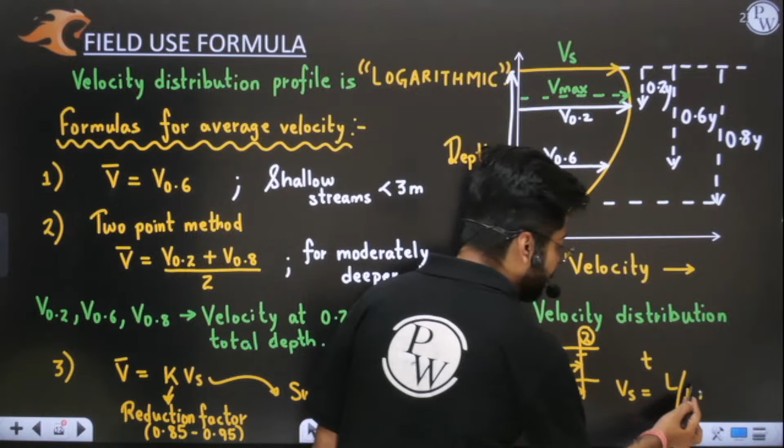Your stopwatch will be started when the float crosses section 1, and once it reaches section 2, you will stop the watch. Then you read the time. Velocity is distance upon time. The float has taken time t in traveling distance L, so you divide L by t to get the surface velocity, since the float is floating over the surface.

Put this surface velocity here, multiplied by reduction factor 0.85 or 0.95 or 0.9, whatever it is, and you will get the average velocity. So this is how you measure average velocities. Now the question arises, why have you told me these three formulas? Average velocity formula is different for different conditions.

If you have surface velocity, you will use this formula. If you have moderately deeper streams, then this formula will be suitable. Deeper streams will have too much difference between upper depth and lower depth. Near the surface, velocity will be very different compared to lower depths. So I will require velocity at 2 points so that I get a better answer.

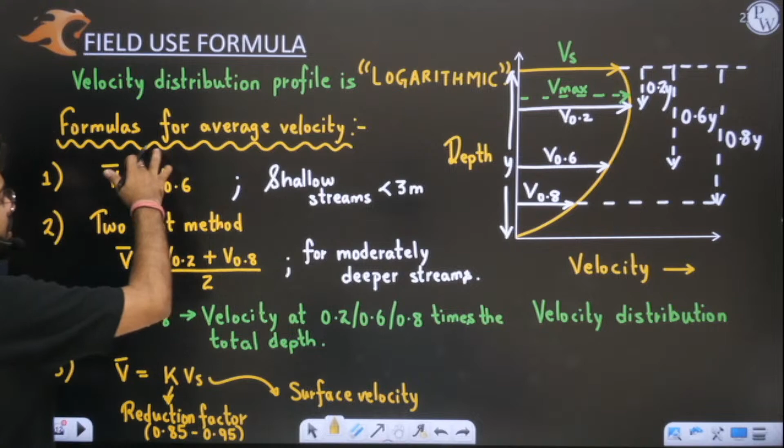But when you have shallow streams, you can go somewhere in the midsection, such as 0.6 times the total depth, and simply measure the velocity. That will give you the average velocity.

Average velocity is a kind of velocity. Let me draw a line here. So average velocity is a kind of velocity which remains constant throughout the section. We have assumed average velocity. So this is your V average. V average means we have constant velocity throughout the section.

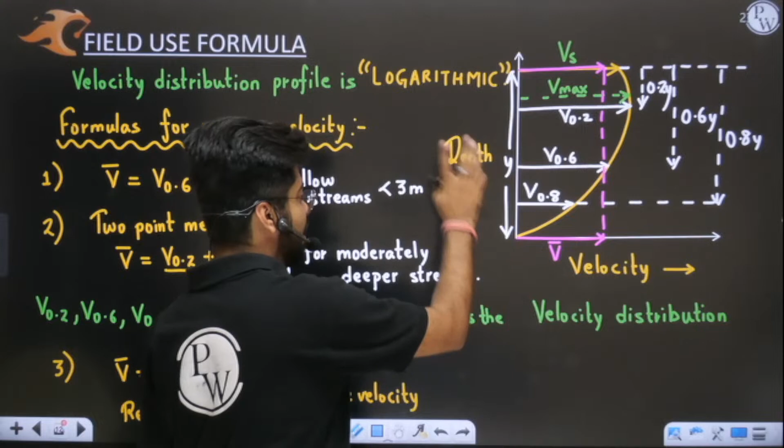So if I want to replace my velocity distribution, this actual velocity distribution, with some average kind of velocity distribution, I will use V average here. You need to understand that the discharge which will pass through this actual velocity distribution and the discharge which will pass through this average velocity distribution will be the same. This is the concept behind it.

Now, how will I find discharge? Obviously, I will find discharge using the formula area into average velocity. That's why I'm interested in these field formulas. Discharge will be area into velocity. So in order to find the discharge through your stream section or river section, I will find this average velocity.

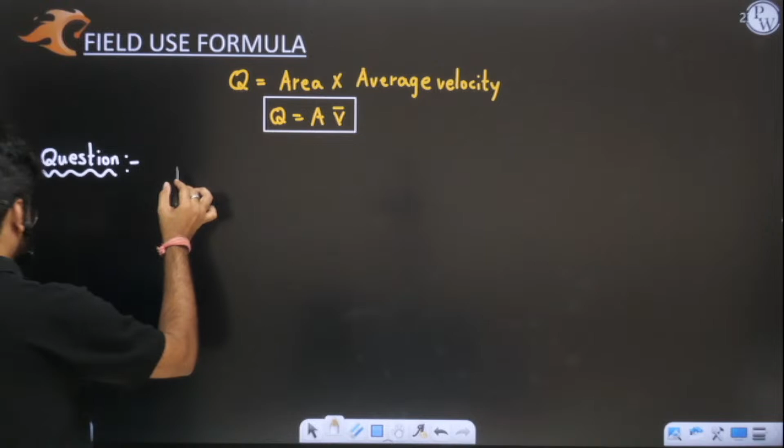One question has been asked in the GATE examination. According to that question, find the discharge through a section. Everyone quickly solve this question. It's a very simple question. Find the discharge through a section.

Velocity at 0.2 times the depth is 0.4 meter per second, and velocity at 0.8 times the depth is 0.6 meter per second.

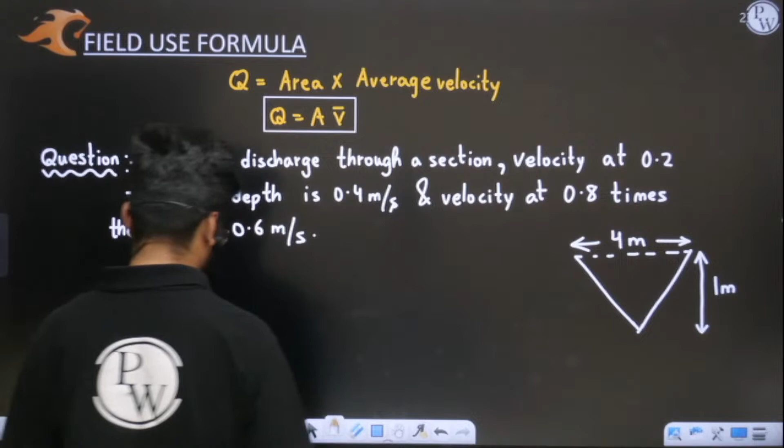And this is your triangular cross section. The top width is 4 meter, and this is 1 meter. So find the discharge through this one. I'm giving you 1 minute's time. With the help of this data, you can simply find the discharge through this triangular section. It's very simple.

So it will be equal to, tell me what discharge you are getting here. If you want to find discharge, first we have to find the velocity. We will use the 2-point method here. 2-point method means first I will go at a depth of 0.2 times, then secondly I will go at a depth of 0.8 times.

This is 0.2 times the total depth. This is 0.8 times the total depth. And there we have measured the velocities, which are given in the question. By the 2-point method, average velocity will be v0.2 plus v0.8 divided by 2.

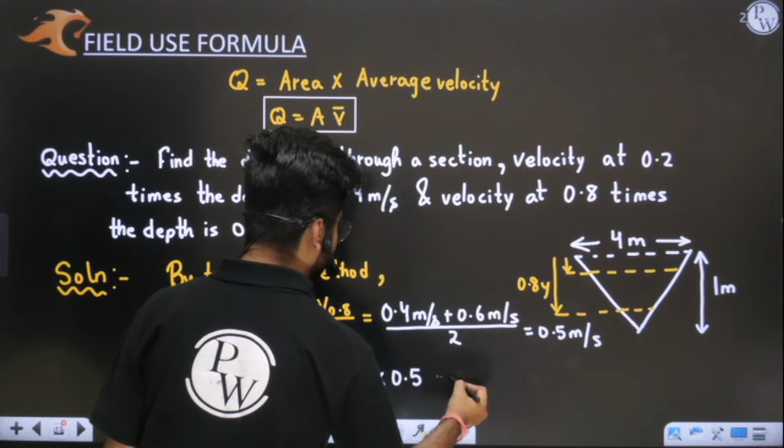Now what is the area of this triangle? The area will be half into base into height. V is 0.5. Base is 4. Half into 4 into height 1. So this is your area, multiplied by average velocity, which is 0.5. So you will get 2 into 0.5 is 1. 1 meter cube per second.

See, this is in meter per second and area is in meter square. Meter square multiplied by meter per second is meter cube per second. So this is the value for discharge. 6? No, it is not 6. It is coming out to be 1. 2 multiplied by 0.5 will be 1. I hope now it is clear.

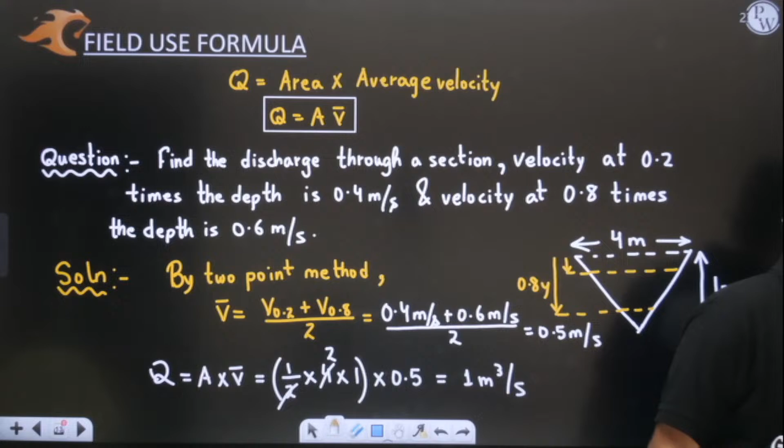You should obviously attempt state examinations, because when you crack it, you will get a job near your home. So attempt it no matter what, be it descriptive or objective. Pattern changes with time, but if the syllabus is changing, it is changing for everyone. You are not special, so that difficulty will be faced by everyone. No need to worry about it.

Now we'll discuss the measurement of discharge. This will start properly tomorrow, but let's have a quick introduction about it so that it is easier tomorrow.

For measurement of discharge, we have different methods. Some methods are direct methods, which are performed directly on your stream. The very first one is your area velocity method.

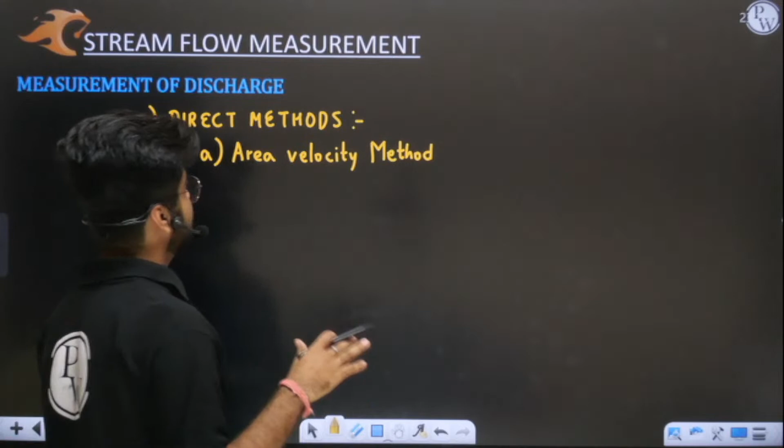In GATE 2023, a question was asked directly from area velocity method, a direct question, so this formula is important now. This measurement of discharge topic is not so important, but this time IIT Kanpur tried to surprise you, that's why we have seen a question from here also.

So area velocity method, then we have moving boat method, then we have dilution technique. Dilution technique is there. Then we have electromagnetic method.

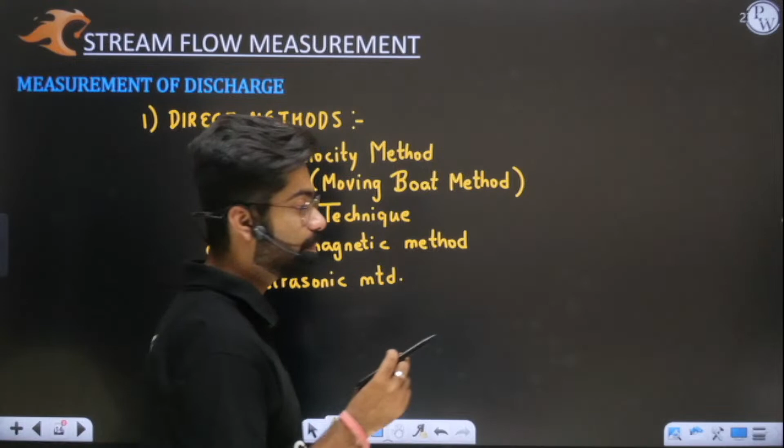I will give you an idea about each and every method tomorrow itself, but first let me tell you the names of these methods, since the names are important for the state examinations. In state examinations or engineering services prelims, only names can be asked. So electromagnetic method, ultrasonic method are there - different kinds of methods suitable in different site conditions and existing conditions.

So these are some direct methods. Out of these, area velocity and dilution technique are important, but the overall topic is not so important. If we have to choose which two are most important, I will say these two. Now some indirect methods are also there.

Some indirect methods are also there. So these are direct, these are indirect. In indirect methods we have some flow measuring structures such as weirs and notches. You must have heard about weirs and notches in fluid mechanics.

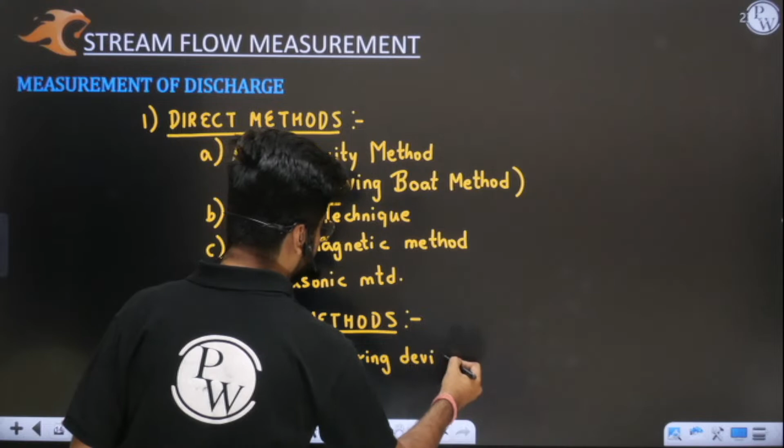We have certain kinds of broad crested weirs, sharp crested weirs. With the help of the stage discharge, or head and discharge relationship, you can simply find the discharge directly. These are flow measuring structures, constructed at control points. When water passes through these structures, automatically you get the discharge, you get the volume.

These flow measuring structures are such as weirs, flumes, etc.

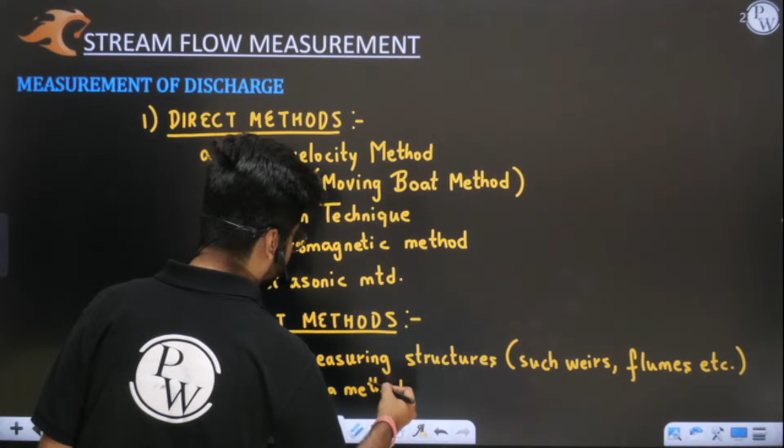Secondly, we have slope area method. One question from slope area method has been asked in your mains examination once in engineering services, so we'll discuss one question of slope area method tomorrow. So these are all the methods with the help of which you can measure discharge. According to me, you should focus on these two only, and other methods are not so important.

Weirs and flumes will also be discussed in irrigation. So this will be the end of today's lecture. I hope you have enjoyed it.